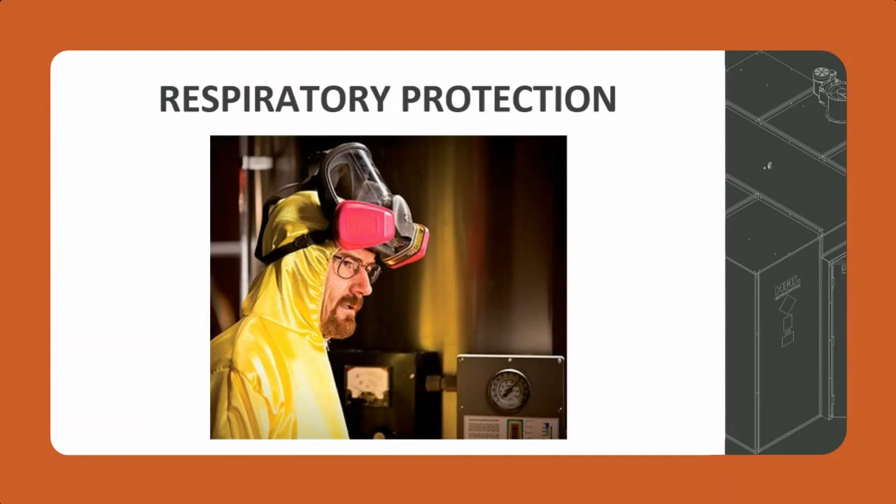But I think the most important thing for employees beyond the PPE they wear is really the training and the documentation you have in place to ensure that your operations are consistent. Safety training should really be focused on the following areas when it comes to extraction: equipment operation, hazardous material handling, and of course, emergency situations.

Training when it comes to equipment operation will ensure that all your employees use your extraction equipment the same way and can monitor each other and police each other for any lapses in focus or judgment. A good example of this would be ensuring there is a minimum of 2 people checking equipment every time it's turned on, or between processing runs, to reduce danger to themselves and to future employees who turn on that equipment.

Equipment, of course, is expensive, and so improper use can lead to damage. Damaged equipment can't be used. Production halts, and you can't meet customer demands. So there's kind of a chain effect of negative things that happen when employees are not properly trained on the equipment and how to use it.

Now, hazardous material training: make sure each employee understands the risks associated with working with hazardous chemicals and being in a hazardous chemical environment. Things like properly transfilling gas vessels, properly connecting transfer lines, and proper storage practices when operations are winding down for the day. All these areas are very important to focus training on to ensure a consistent level of training for all your employees, so that everyone is doing everything the same way.

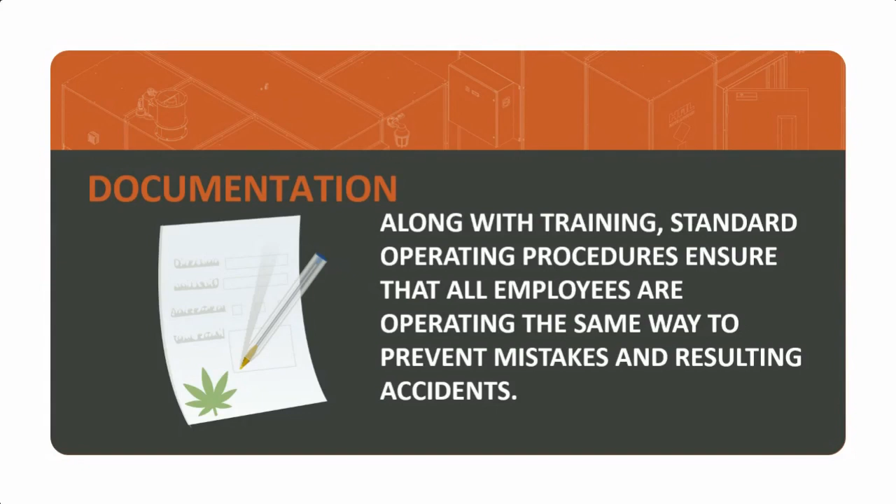All right, so let's get into equipment safety.

I thought equipment safety made sense to follow employee safety because equipment is going to be an extension of your employees. They are directly interfacing with your equipment, but there are also critical points in your operation where you're going to want to introduce trained professionals to the mix and make sure that everything is verified and properly inspected by a third party.

I'll say it now and I will say it again later, maybe multiple times. I really cannot stress enough that you should not be performing repairs or structural maintenance on your equipment. If there is any damage visible to, let's say, a pressure vessel or a piece of equipment responsible for carrying volatile chemicals, you should stop using that equipment immediately and refer back to the manufacturer on how to best proceed. A lot of manufacturers will just replace that piece for you, or you can send that equipment back to them and they will perform the repair.

So the first step in equipment safety is going to be selecting the right equipment for your operation. Typically the equipment you're selecting is going to be dictated by the type of solvent you want to use, your desired throughput, and your desired final products.

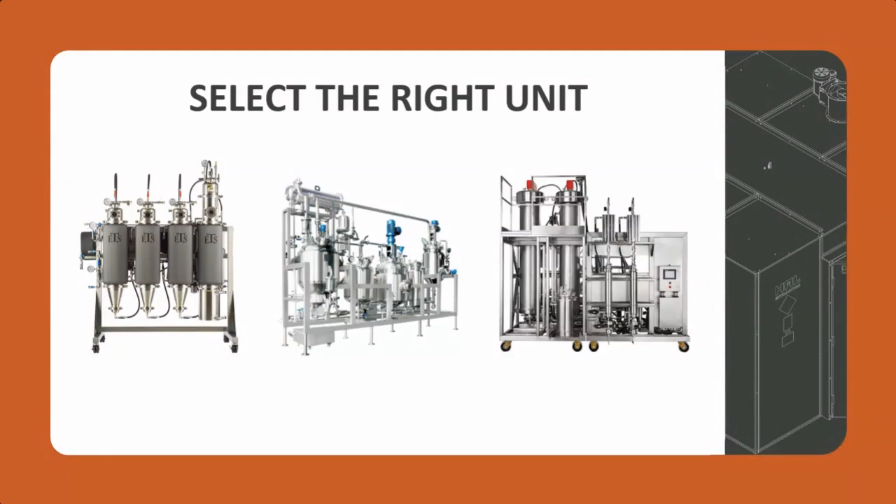And so once you have selected your proper unit, you're going to want to move into the install phase. The install phase is, I think, the most critical point when it comes to equipment safety.

A lot of manufacturers will actually offer up installation courses, so you can have a member of your team visit the manufacturer, become accredited in actually installing their units, and can do so at your facility. A lot of manufacturers will also offer sending a technician to your facility to install the equipment for you. Another good option, of course, anytime a professional is involved, the outcome on the safety side of things down the road is going to be a net positive.

And the more complex the equipment, the more complex the install. So really, I can't stress enough that having trained consultants do this for you will save you time, headaches, and increase the safety of your operations down the road.

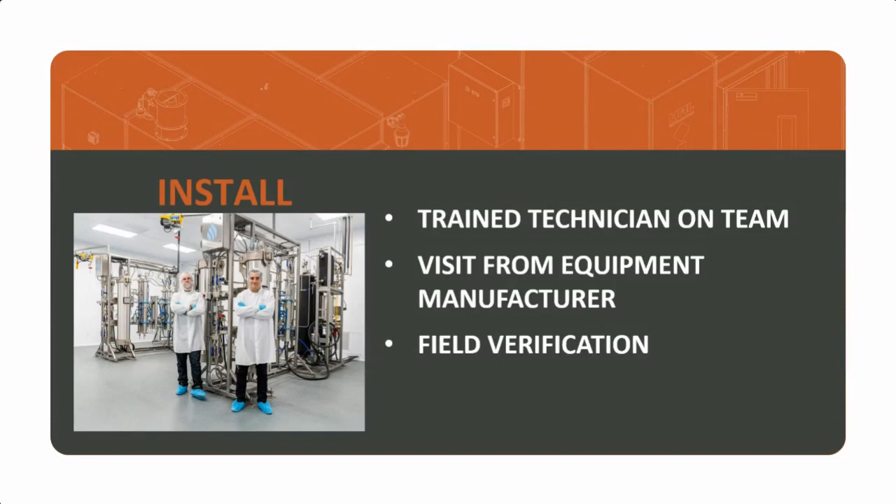And the final piece of the install is going to be field verification. So to ensure that it is safely installed, you want to have someone from a third-party service come out and actually perform field verification of your equipment.

And so we actually partner pretty closely with the folks at UL and PSI. I think PSI are well renowned to be some of the leaders when it comes to third-party verification inspections of equipment once it's been installed.

Most jurisdictions do actually require this as part of the licensing process. I do think it's important that even if your local jurisdiction does not require it, you do it anyways. There are things that you might not know about when it comes to the integrity of the equipment that a third-party inspection can bring to light.

Typically, the inspections will focus on the integrity of pressure vessels, inspection of lines and various breakpoints, kind of weak points in your equipment, and just verify in general that the install was done correctly. The inspector is also going to verify the environment around the equipment is properly ventilated and has the necessary components in place for safe operating of the equipment.

And I think, going back to PSI, they specifically have been doing this for the cannabis industry for a while now, so I think they're always a good source when it comes to third-party verifications. But again, once the equipment's been installed, and typically prior to really getting into heavy operational use, you're going to want to have someone come out and just make sure that everything is put together correctly.

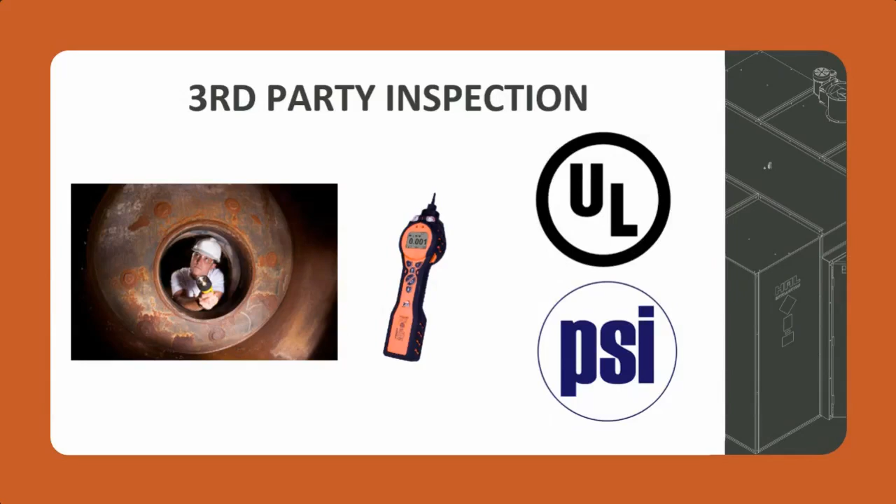Now, I did mention maintenance being important, and that it's important to source maintenance back to the manufacturer. That being said, a lot of extraction equipment is designed to be used with components that will degrade over time.

So things like clamps, bolts, nuts, gaskets, filters, images I have here on the screen, even let's say solvent transfer lines, a lot of these things will degrade and show signs of wear and tear after repeated use. So I think another important piece of equipment safety is to perform regular inspections of these components and make sure that they are maintaining their integrity.

But then also have a strict maintenance schedule in place to ensure that these components are being replaced regularly, regardless of how they appear. I think humans have a great knack of missing things that are important. And so just by having a regular schedule in place, you can ensure these components maintain their integrity and stay in a safe state.

I said I was going to mention it again, and here I am. So, finally, if any of these pressure containing vessels, any kind of structural components in your equipment show any sort of damage, you absolutely should stop operations and get that equipment repaired.

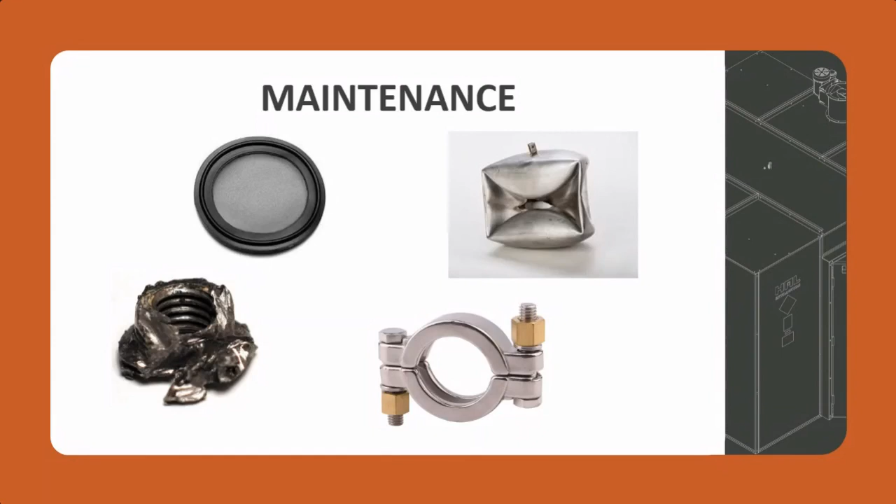All right, and facility safety. So employees and equipment all go inside your facility. So I thought that'd be a nice way to kind of wrap up our little safety presentation here.

So because a lot of the time extraction operations are dealing with pressurized and combustible solvents during these processes, it is paramount that you have things like proper ventilation and fire suppression in place in your facility. There are also considerations to make when it comes to signage that you place in your facility.

There's a lot of studies that show that even just a daily reminder of training of a hazardous environment, of trying to reduce ignition sources, things like that, just that daily reminder can go a long way in improving safety and practices for your employees.

And as we've all experienced, if you're in a stressful situation, it can sometimes be difficult to recall exactly how to conduct yourself. And so having signs around can quickly help employees recenter themselves and act properly in the case of an incident.

Exits are very important as well. Going back to that video I mentioned earlier, you really should have accessible exits for your employees to quickly and efficiently vacate and escape from dangerous situations. This means having doors that open outwards and have panic bars on them, and just in general allow employees to quickly escape a dangerous situation.

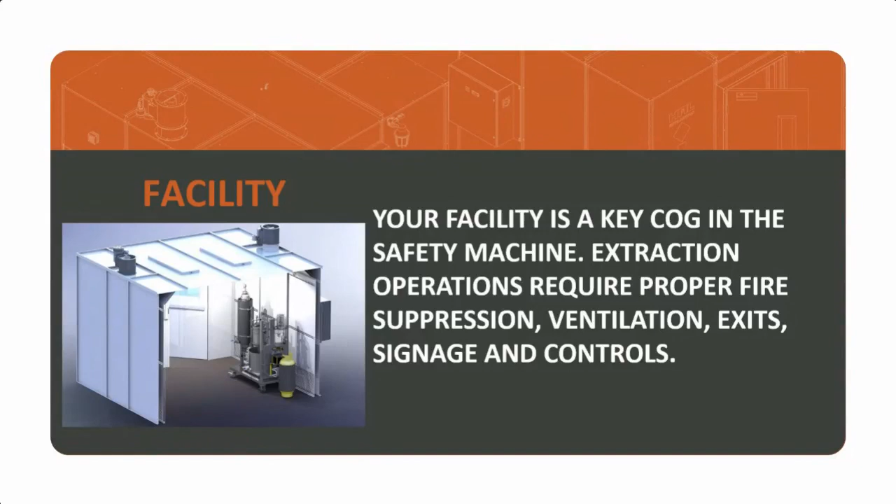Because extraction operations typically involve using combustible or flammable solvents like hydrocarbons or ethanol, you want to have fire suppression in place that can adequately put a fire out if there were to be some sort of failure. Initial explosions and ignitions can be dangerous in their own right, but because there's largely spent feed inside an operation room, or even things like employee clothes, there's fuel readily available in that environment for that initial combustion or explosion to ignite and cause a sustaining fire.

Fire suppression is extremely important in taking that fire out of the picture, and can be automatically triggered when a certain level of heat is detected. You want all this to be automated, similar to a conventional fire suppression system. If a certain level of heat were detected inside the environment, the fire suppression would kick into place, and the suppressant would be released, ideally putting out the fire before it causes too much damage.

I think it's also important to have a handheld local fire extinguisher readily accessible for employees. This allows them to manage smaller fires. If an employee identifies that a small fire is starting, and it hasn't gotten to the point where it's dangerous enough for them to have to vacate the premises, they could put out the fire right then and there, preventing further damage or a greater incident from escalating.

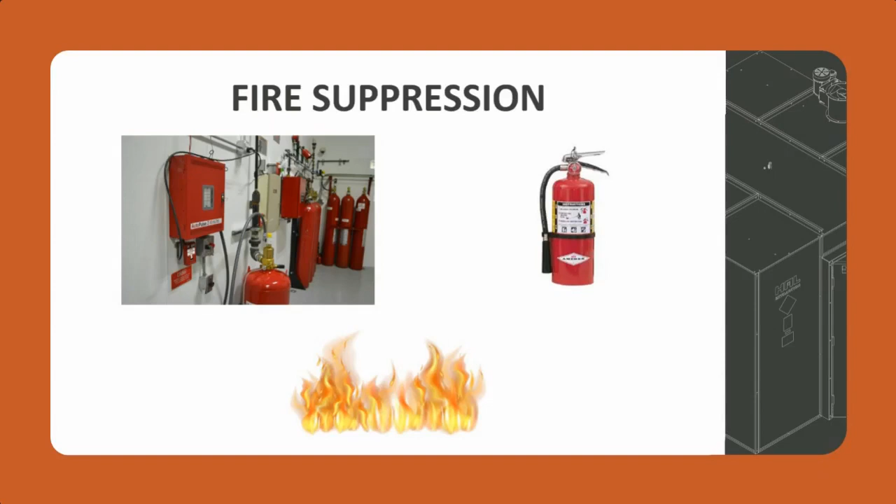Another important piece of facility safety is having adequate ventilation. International regulations dictate that control areas containing hazardous chemicals must be properly ventilated. The amount of required airflow will vary based on the hazardous chemicals being stored or used in that environment. The idea is that ventilation prevents these chemicals from pooling and amassing to the point where they become a combustible source and a safety issue, both for explosion reasons and respiratory reasons. You don't want your butane to pool to the point where it hits those lower explosive limits and becomes a fuel source.

You want to have fans in place, similar to a paint booth or extraction booth that we manufacture, to ensure proper ventilation is always in place, and that the air inside the booth or your lab is being vacated from that space quickly and adequately in times of need.

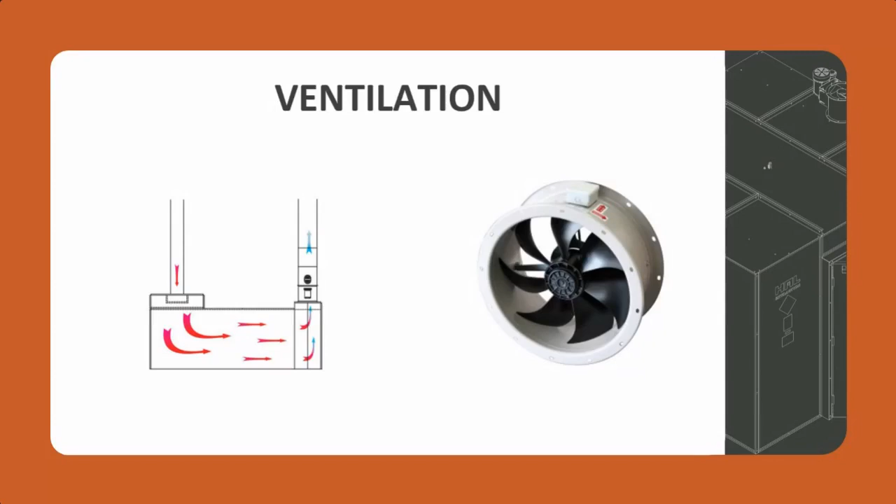This all ties together with the controls and automation. By having an active system in place, we can really monitor the environment inside your lab. This is extremely important because humans in general are ill-equipped to detect dangerous environments through our senses - smell, sight, and touch. It's hard to identify, especially with a lot of the medical grade solvents used in extraction processes, if there's a dangerous amount of butane in the air, for example. Making sure you have proper sensors and controls in place to detect these dangerous environments will prevent a lot of bodily harm and injury to your employees. At a minimum, you want the LEL sensor, like I have here on the screen, that's calibrated specifically to the solvent you're using in your extraction processes.

What this does is detect when a certain concentration of that solvent has amassed in the air. That concentration is the amount needed, if an ignition source is introduced, to actually cause an explosion. Of course, we want to avoid that amount from ever being created, so the LEL sensor will identify if that happens. Going back to automation, if you have the right controls in place, it can kick your machinery or ventilation into higher gear and vacate the air in your booth to ensure a safe operating environment is achieved as quickly as possible.

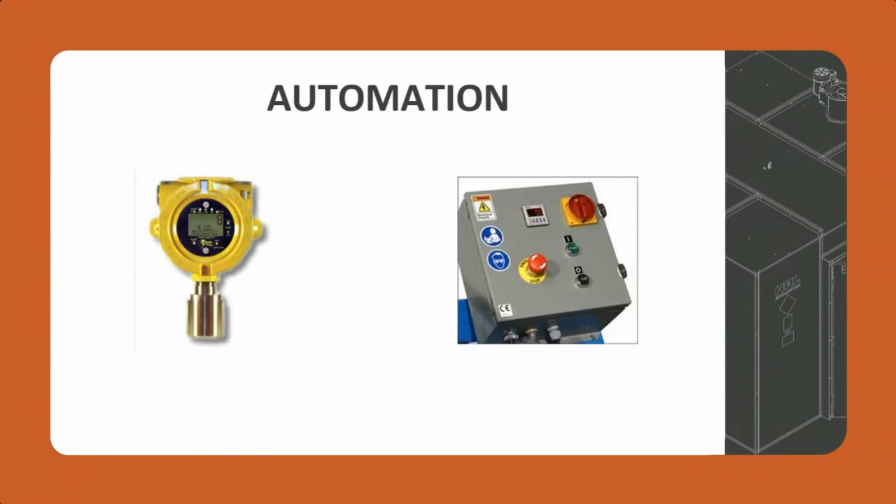Standard labs will be Class 1 Division 1 or Class 1 Division 2 rated, and the components within those environments will also be rated as such. You want to make sure any equipment operating in that environment meets that same rating. But it's also important to know that outside equipment or even personal effects brought in by employees can also create ignition sources.

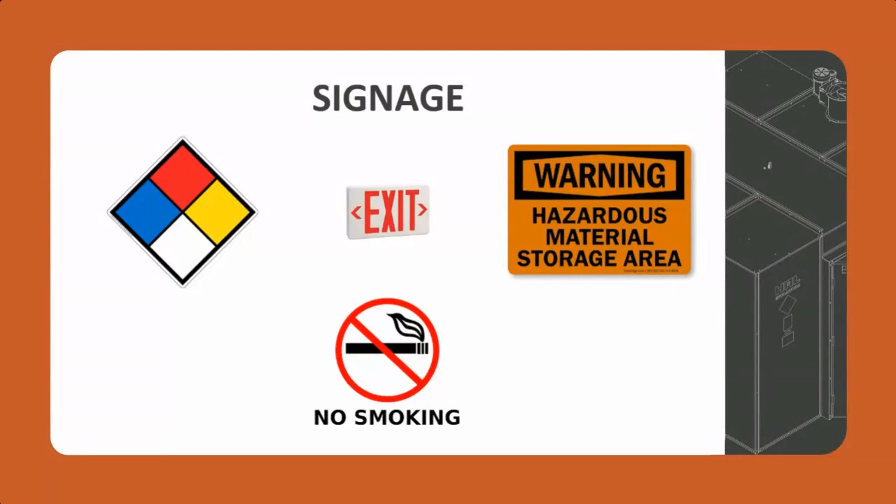So, final tips to wrap this all up. I mentioned over and over training employees. I still think this is a key area you want to focus on increasing safety in your operations. Make sure employees are all trained the same way. Everyone understands exactly how to operate equipment, how to protect themselves, and how to respond to dangerous situations. These are all going to go a long way in improving employee safety.

Second, I think listening to your employees is one of the most important things you can do if you are managing or own an extraction operation. They are on the front lines, they see the equipment daily, they are the ones actually conducting the operations. So they will be the ones that see first any potential points of failure or risky areas.

Third, hire professionals to review, design, and execute builds of your facility, to create your standard operating procedures and safety practices, or at least review what you have in place. This goes a long way. There are folks with years of operational experience who can bring that to your facility and help you avoid mistakes they may have made in the past.

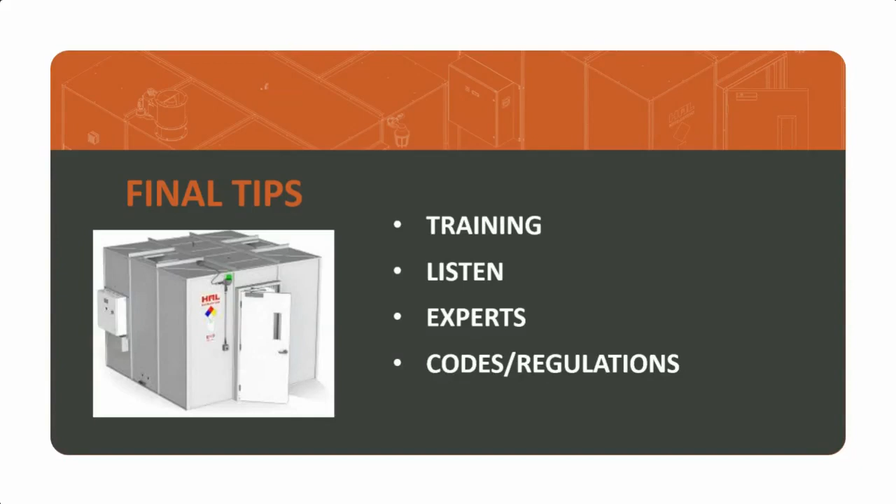So that's what I had put together for today. Again, I know it was very basic, being the first in our series of webinars, so there may have been times I was rambling, but our intent is to get these better and more refined as we go through the weeks. What I plan on doing is releasing more content, probably about one webinar a month, and ideally bringing in partners with experience in specific areas of extraction to help provide better content to folks like yourselves.